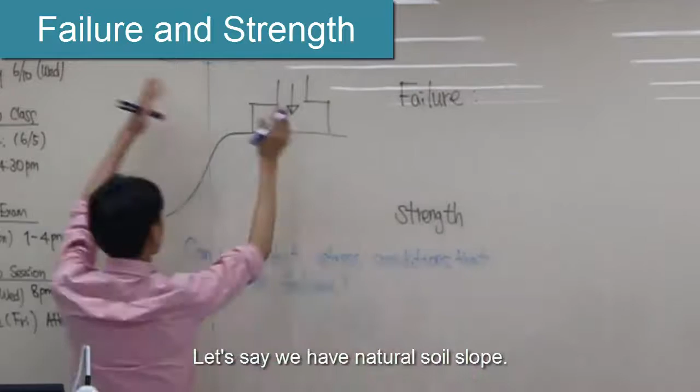What's the definition of a failure? Say that we have a natural soil slope, and we're building a structure on top of it. Depending on the weight of that structure, you increase the stress in the soil—maybe here, maybe here, maybe here too. Initially, the vertical stress was sigma naught, and because of this foundation and the upper structural weight...

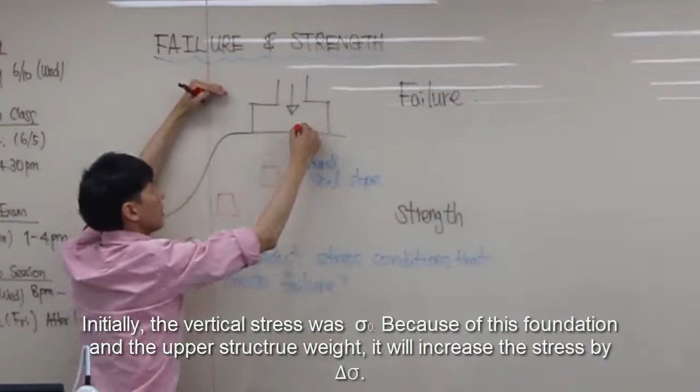it will increase the stress by delta sigma. Then, if the delta sigma exceeds the certain threshold value the material can sustain or resist, you develop failure. The soil will slide for this condition—it's easy to slide down because of the weight.

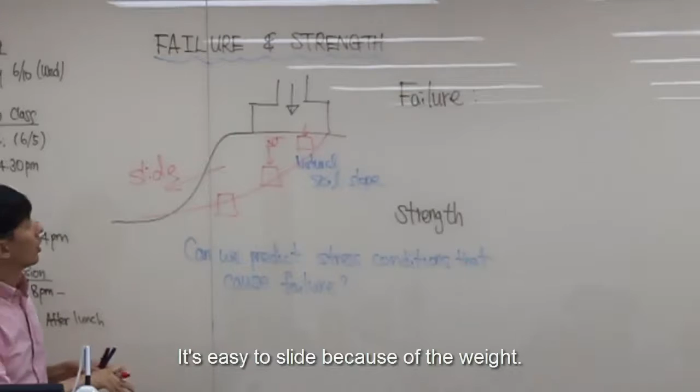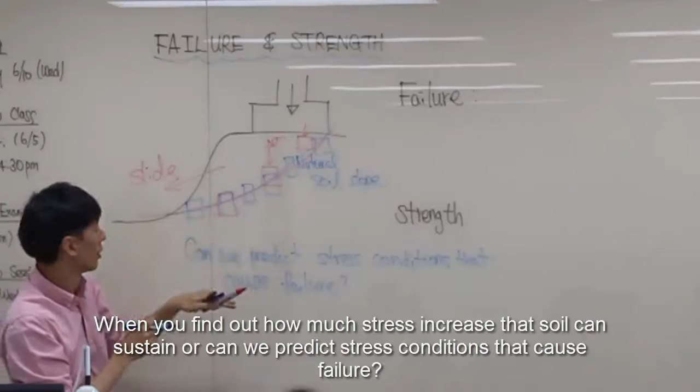When you look closely at the failure envelope or failure line, you have a failure surface, and each soil is failed because of excessive stress. So we need to find out how much stress increase the soil can sustain, or can we predict the stress condition that caused failure? Then we can compare that failure stress condition to the current stress condition and see how much more load can be sustained by this soil.

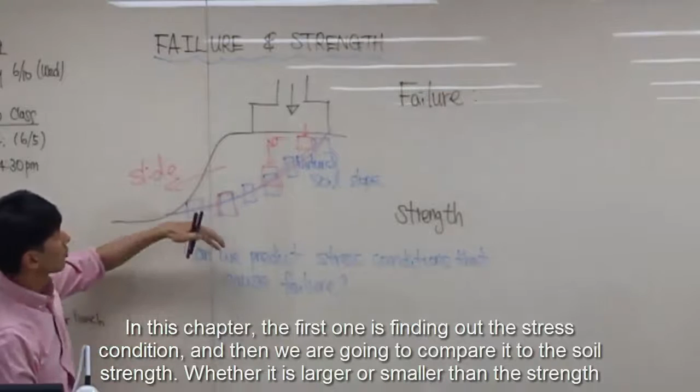So in this chapter, the first question is to find out the stress condition. Then we're going to compare that to the soil strength, whether it's larger or still less than the strength of the soil. That will be our main question of this chapter. So let's define failure first.

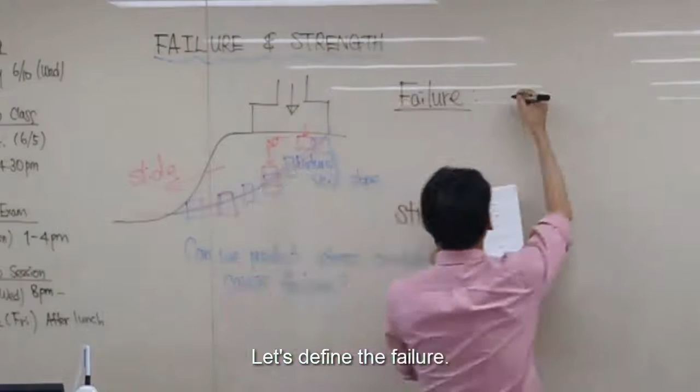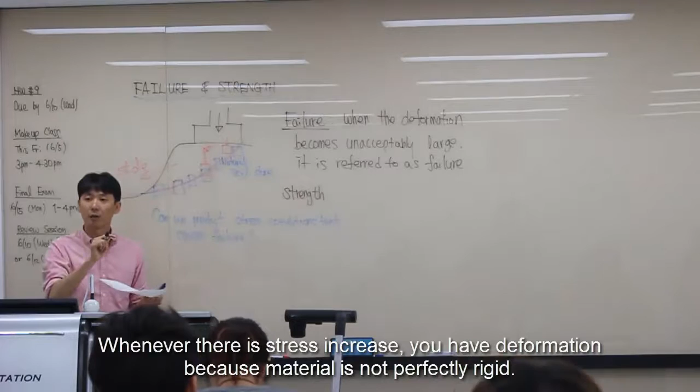Failure is when the deformation becomes unacceptably large—that's referred to as failure. Whenever there's a stress increase, you have deformation because material is not perfectly rigid. Whether that deformation is acceptable or not determines whether the material, the media, the ground, or the structure has failed.

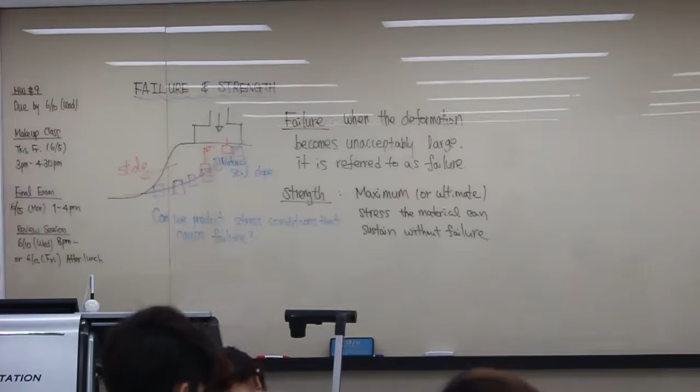Strength of material is defined as the maximum stress that the material can sustain without failure. Let's go back to this natural slope case.

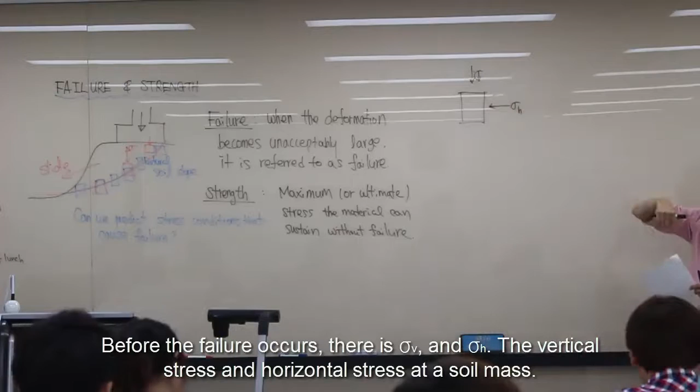When you closely look at the soil here, there's a failure envelope. Initially, before the failure occurred, there's a sigma V and sigma H—the vertical stress and horizontal stress at that soil mass. Suddenly, because of this delta sigma, it failed along this failure line. This is the failure plane.

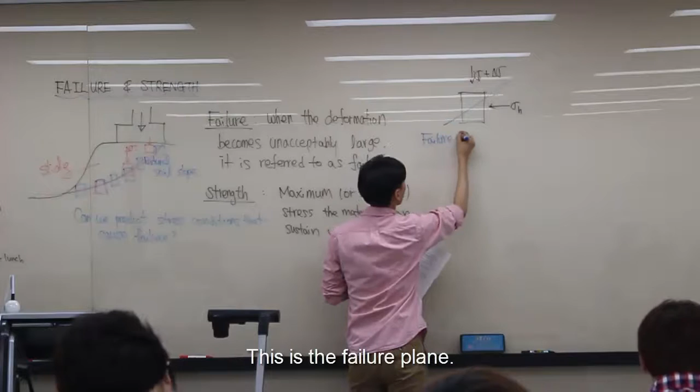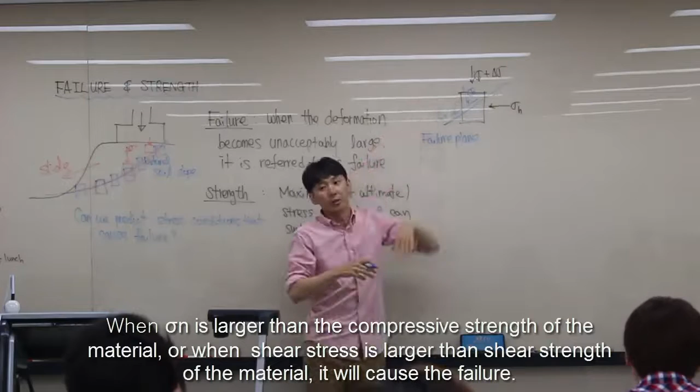Then, when we look at this failure plane, there should be a normal stress, sigma n, and a shear stress, tau n. So whether this sigma n is larger than the compressive strength of the material, or whether this shear stress is larger than the shear strength of the material—either of these cases will cause failure.

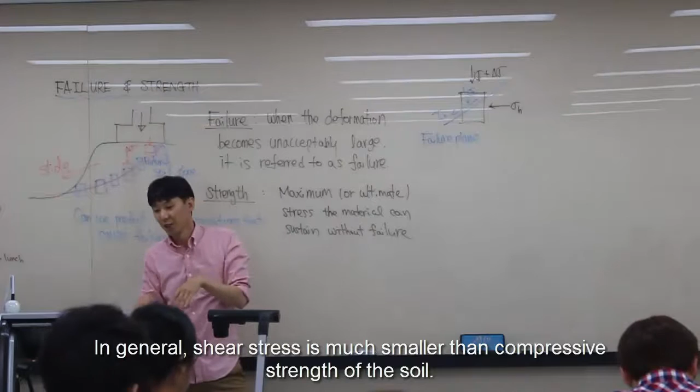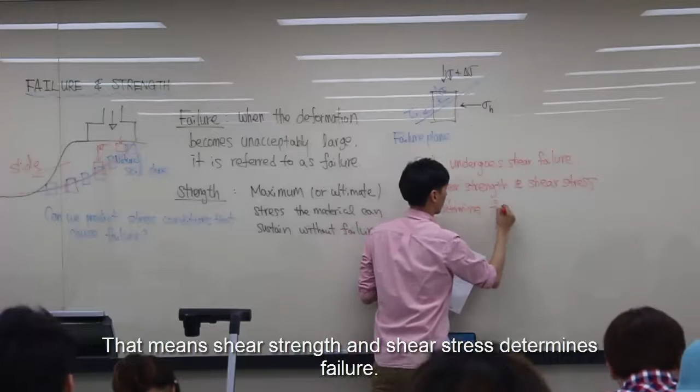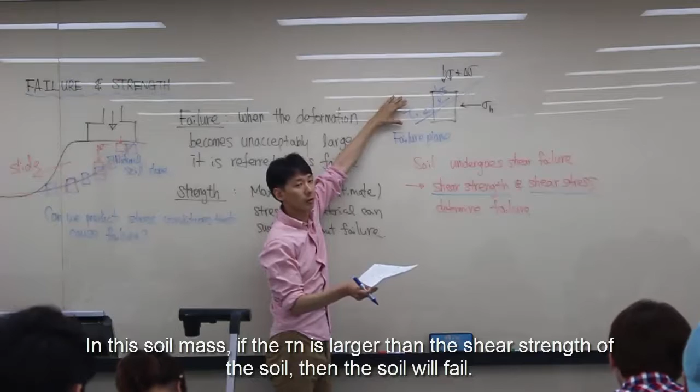In general, shear strength is much less than the compressive strength in soil. So that means the shear strength and the shear stress determine the failure condition. In this soil mass, if tau n gets larger than the shear strength of the soil, the soil will fail. If less than that, the soil can resist or sustain without failure.

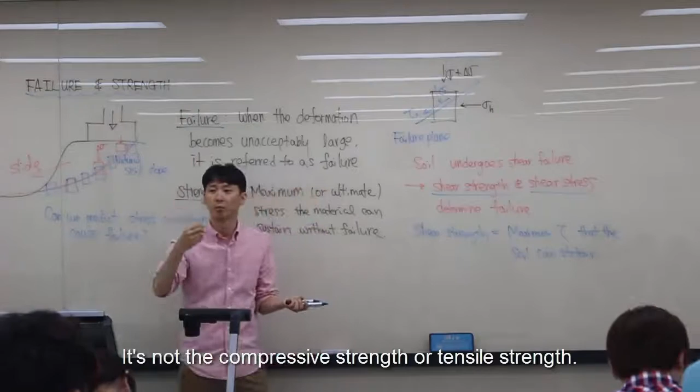So in soil mechanics or geotechnical engineering, in terms of strength criteria, shear strength is the most important—not the compressive strength or tensile strength. We only look at shear strength because shear is the weakest part; it's certainly easy to slide.

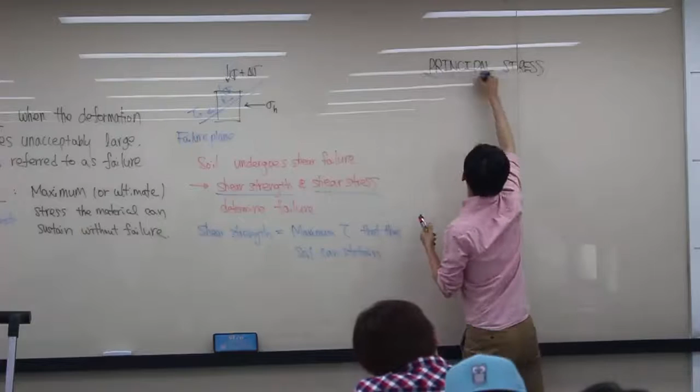Any questions? So, just for this class today, we're going to go back and talk about principal stress, principal strain, and normal stress and shear stress. Principal stress.

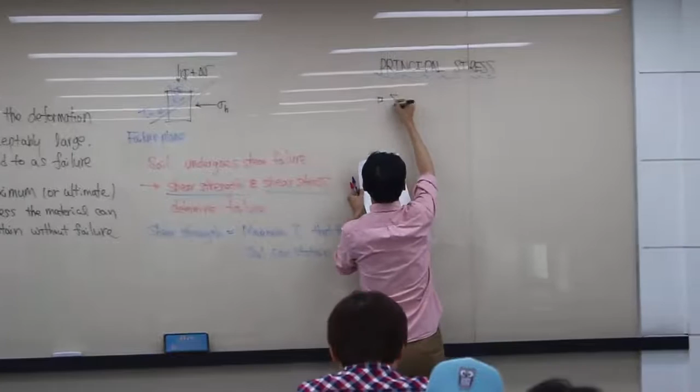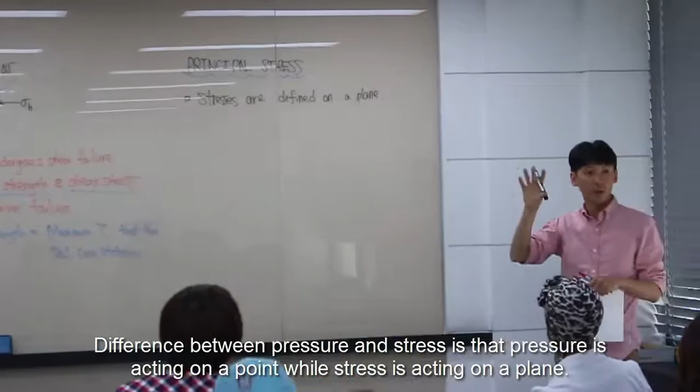We talked about this before, months ago. The difference between pressure and stress is: pressure acts on a point, and stress acts on a plane. That's the difference between stress and pressure.

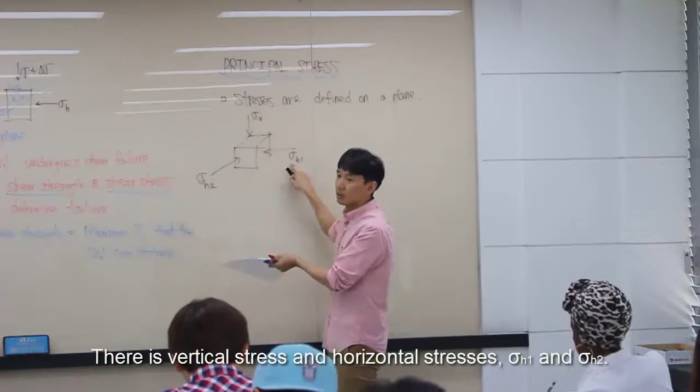In a three-dimensional world, you have three orthogonal planes: sigma V, sigma H1, and sigma H2. For example, if you go outside, dig up, and sample soil from a certain depth, you can estimate the vertical stress and the horizontal stress from two directions—sigma H1 and the other horizontal stress sigma H2.

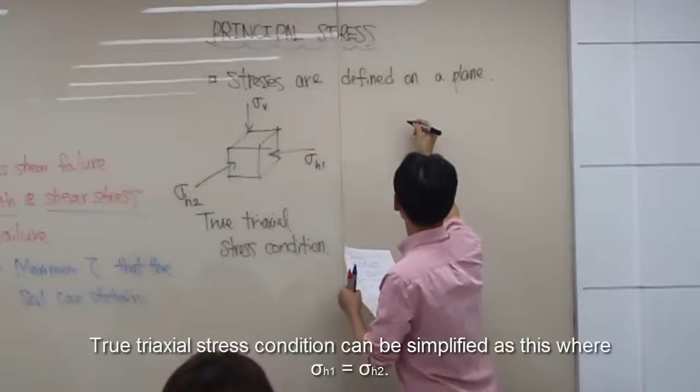Generally, this is a true triaxial stress condition. This true triaxial stress condition can be simplified as this kind of model, where sigma H1 is the same as sigma H2—there's a vertical stress and a stress acting in a radial direction.

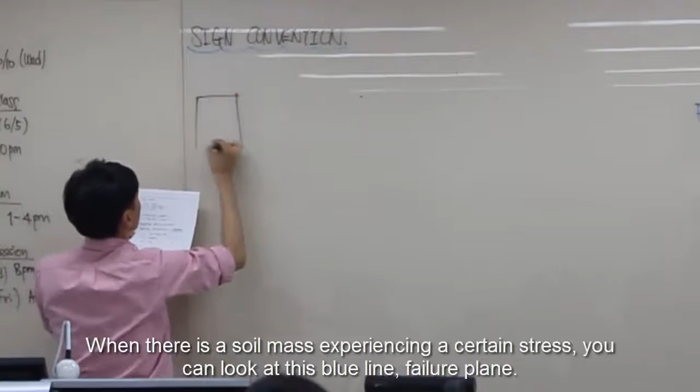So these follow our sign convention, and there's a soil mass experiencing a certain stress. If you look at this failure plane, the blue line, you can take out the bottom part of this little mass like this. The normal stress is sigma n, or sigma sub n—some people call it sigma theta—and this direction is defined accordingly.

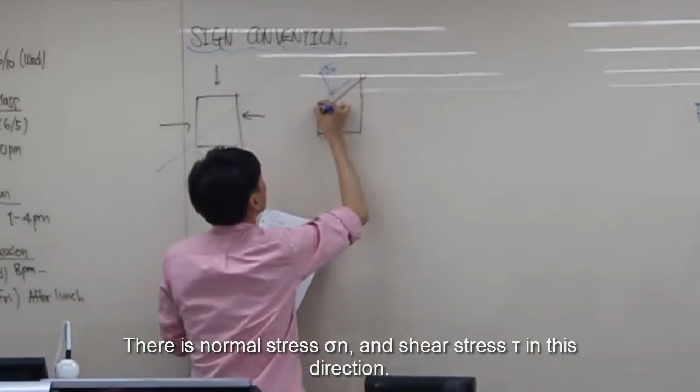So for the normal stress, compression is the plus, it's a positive value. And tau is the shear stress.

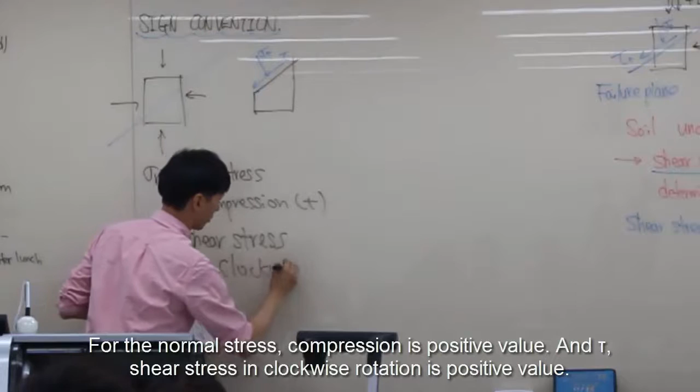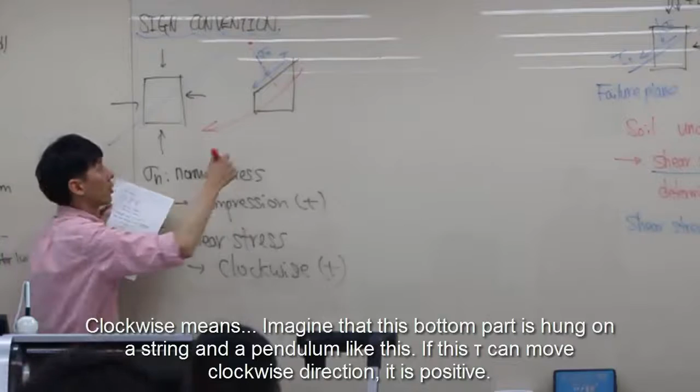Clockwise rotation is the positive value. So clockwise means, imagine that the bottom half of this mass is hung on a string as a pendulum like this, and if this tau can move this object in the clockwise direction, then it's positive. So if the tau is in this direction, this will move counterclockwise, so that's a negative value.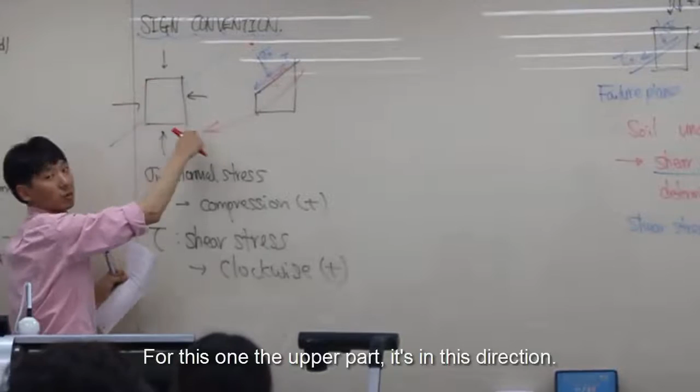So the point is here. Thinking of the string, the material is hung on a string, and that moves in this direction, then it's a positive. For this one, the upper part, this is the normal stress, and this way.

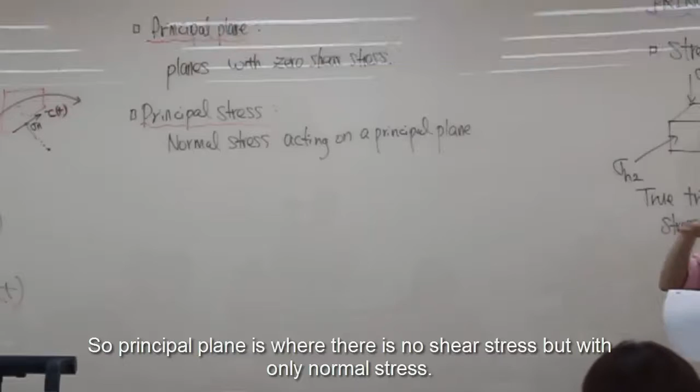So principal plane is the plane with zero shear stress. There's no shear stress, there's only normal stress. And principal stress is that normal stress acting on the principal plane.

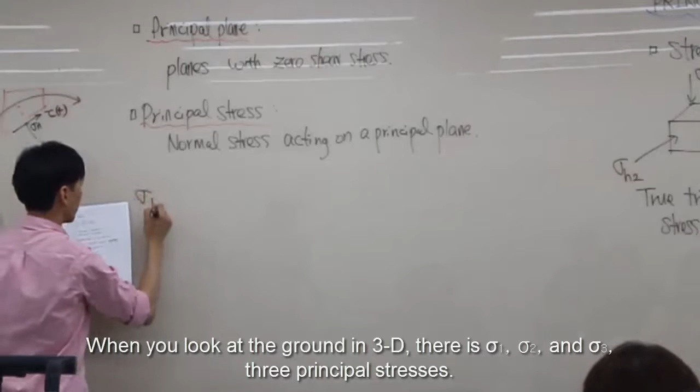This is the definition. So when you look at three-dimensional like ground, inside the ground, then there's sigma 1, sigma 2, and sigma 3. There will be three principal stresses. The largest one, sigma 1, is the major principal stress.

Principal stress, and this is minor. So in terms of magnitude, sigma 1 is the largest, and sigma 3 is the smallest stress.

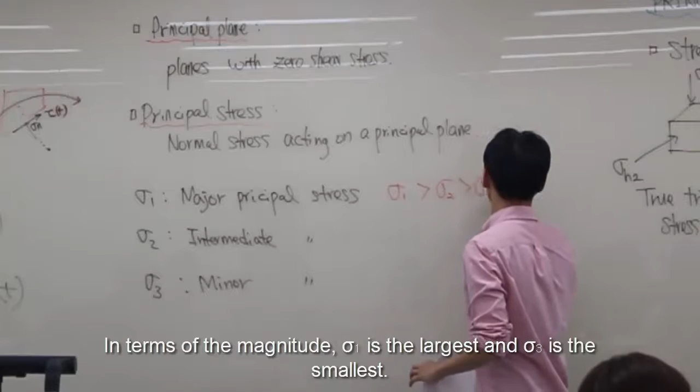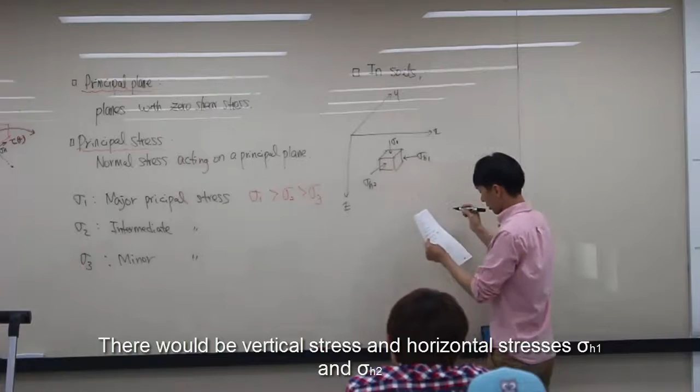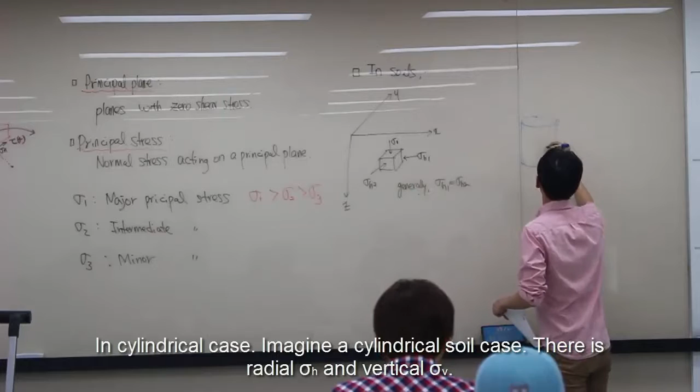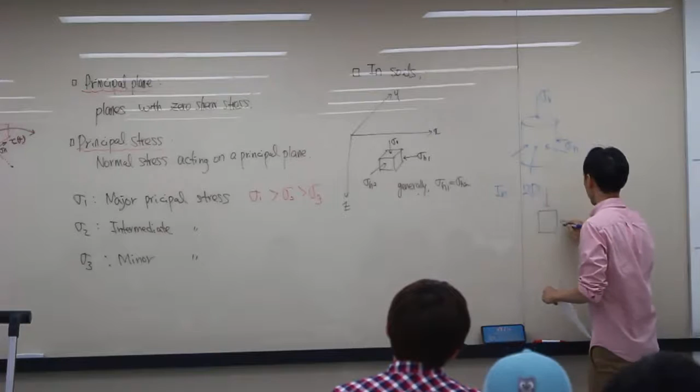So we can divide it into a cylindrical case. We can imagine a cylindrical soil mass with a radial sigma H and the vertical sigma V. And we can simplify it into two dimensions. There's a soil mass, 2D, and say we have a soil mass in 2D plane.

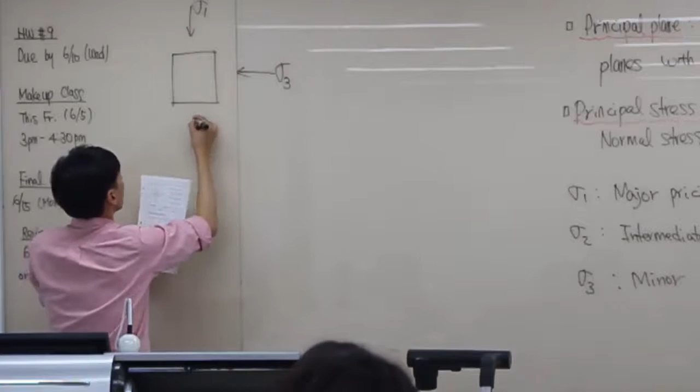Sigma 1 is acting vertically, and sigma 3, the minor principal stress, is acting horizontally on a soil mass. And then, if this is the failure plane, blue is the failure plane, we want to find out the normal stress here and the shear stress on this blue plane, tau theta.

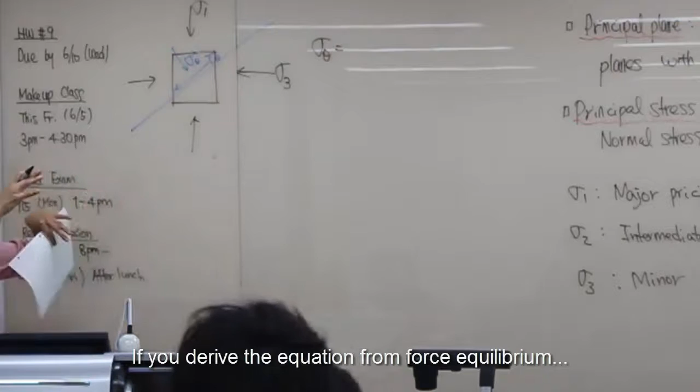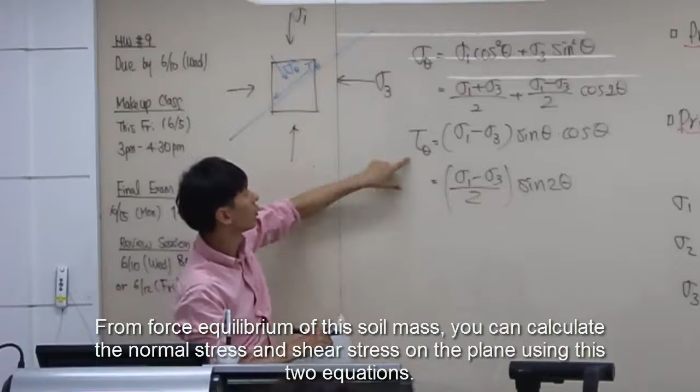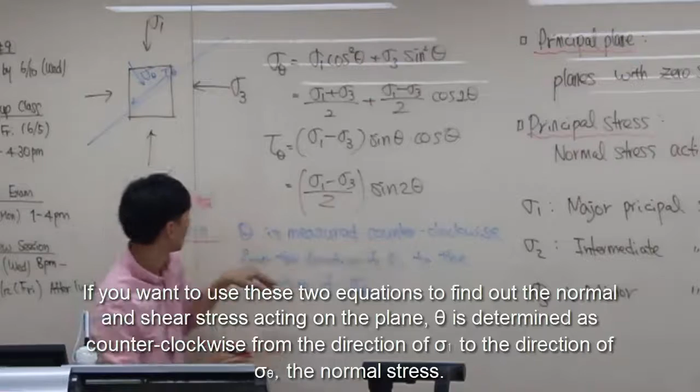And here theta, the important thing is to define theta, the angle of the stress. This is a very important rule. In this equation, if you want to use these two equations to find the shear stress and normal stress acting on a certain plane, then theta is determined as counterclockwise from the direction of sigma 1 to the direction of sigma theta, the normal stress.

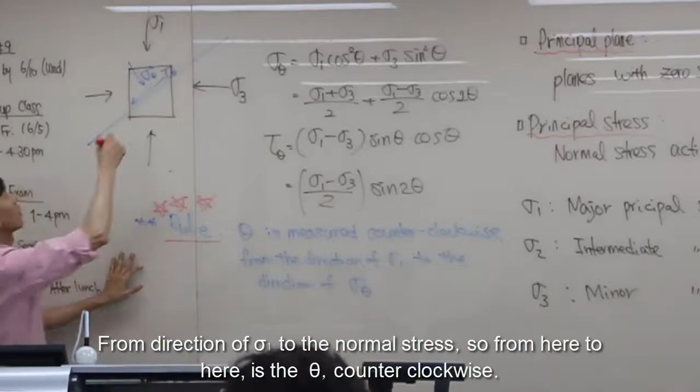So in this case, what's theta? From the direction of sigma 1 here, right? This is the direction, the vertical direction. Vertical direction to normal stress, sigma theta. Sigma theta is acting in this direction. So from here to here is theta, counterclockwise.

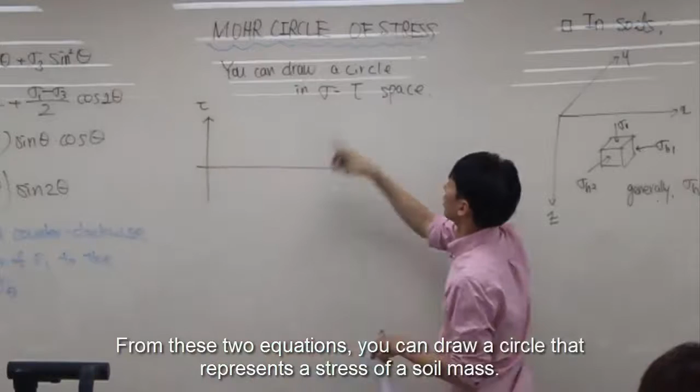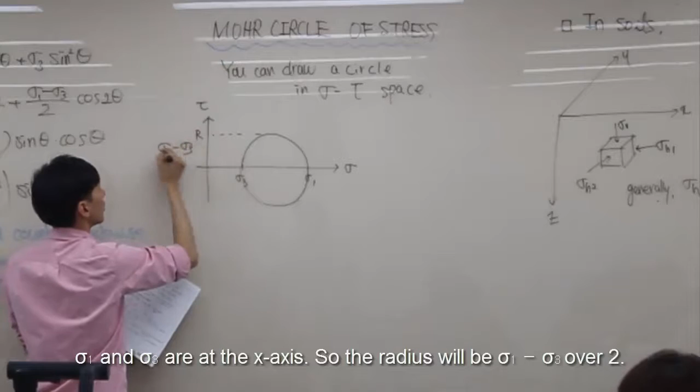So from these two equations, the tau theta and the sigma normal stress equation, we can draw a circle that represents the stress of the mass. Intersect sigma 1 and sigma 3 at the x-axis. And so the radius will be sigma 1 minus sigma 3 over 2, from here to here.

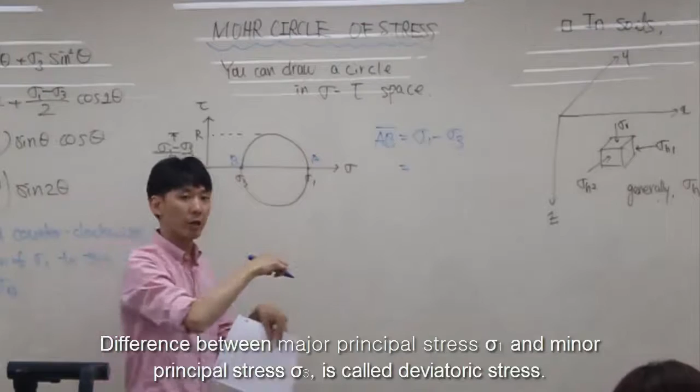And here, let's say this is A and B, point A and point B. And sigma 1 minus sigma 3, the difference between the major principal stress and the minor principal stress, is called the deviatoric stress. What about the center? This is the center, and the location of the center will be sigma 1 plus sigma 3 over 2.

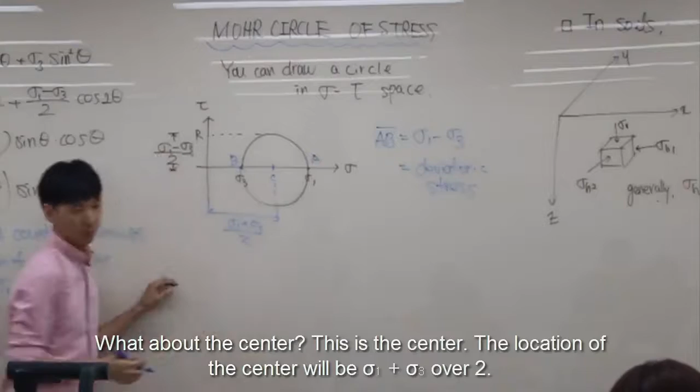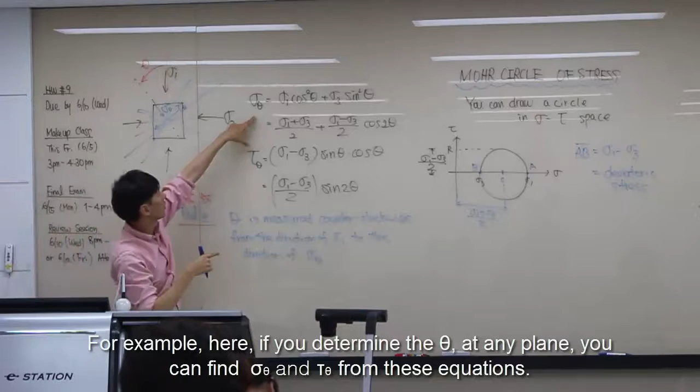This equation indicates that if you know the sigma 1 and sigma 3 of a certain soil mass, you can find the normal stress and shear stress of any plane. For example, if you can determine theta, you can plug into these two equations for the vertical, horizontal, or any angle, and find sigma theta and tau theta. Actually, this Mohr circle represents the normal stress and shear stress of any given plane of interest, and it's called the Pole method.

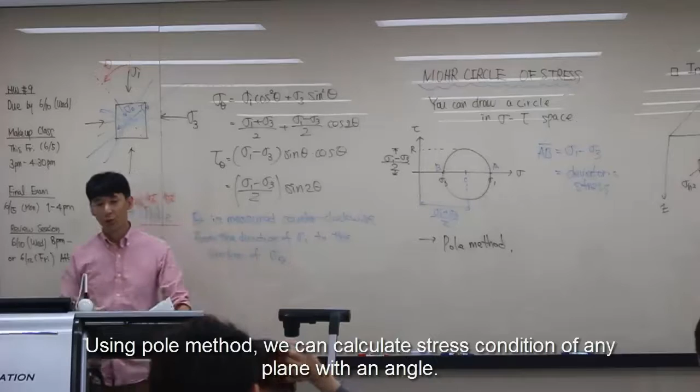Using the Pole method, we can calculate the stress condition on any plane with any angle. The stress condition of the soil mass is described step by step. First is to find the pole of the plane, the origin of planes, so O sub P. To find the pole, in this Mohr circle you have to find it first to determine the stress condition on an interesting plane.

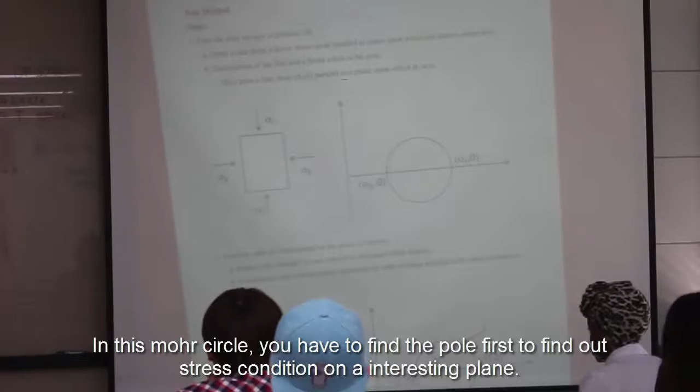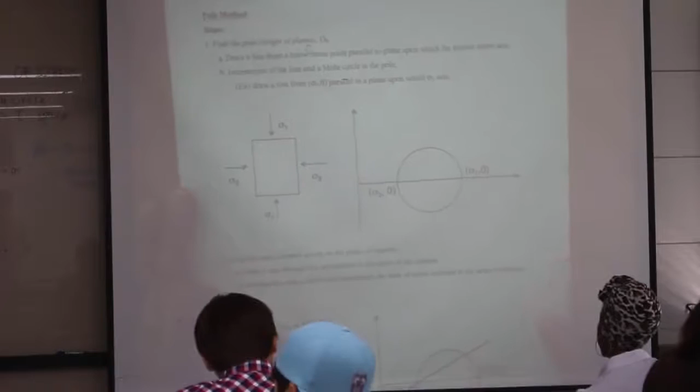So the first step is to draw a line from a known stress point parallel to the plane upon which the known stress acts. Let's say we know sigma 1, the major principal stress, and sigma 3, the minor principal stress, acting on a soil mass. We can draw the Mohr circle like this, where the x-axis is the normal stress sigma and the y-axis is tau, the shear stress - so the sigma-tau space.

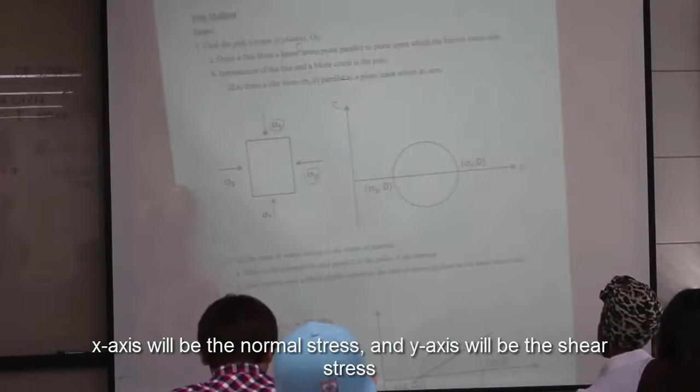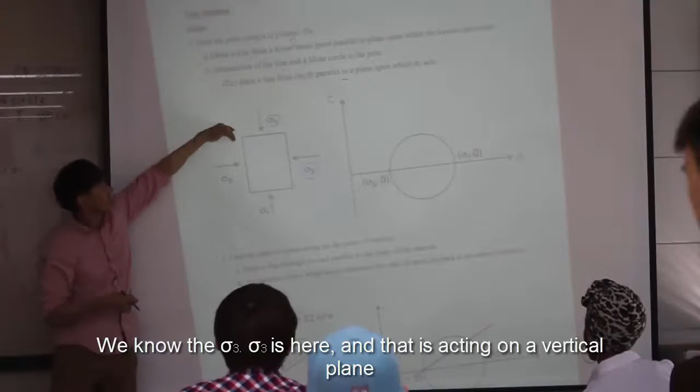Here, draw a line from a known stress. Because we know sigma 3 is here, and that's acting on a vertical plane. The sigma 3 is acting on a vertical plane, so we can draw a line parallel to that vertical plane, crossing sigma 3 on the axis. Then the intersection of the line and the Mohr circle is the pole. In this case, this intersection will be the origin of planes.

Or we can start from sigma 1, because sigma 1 is also a known stress on a known plane. Sigma 1 is here, and sigma 1 acts on a vertical or horizontal plane, so we can draw a line from here horizontally. Then the intersection will be here. So whether you start from sigma 1 or sigma 3, you get the same pole, OP. So this is the plane of interest.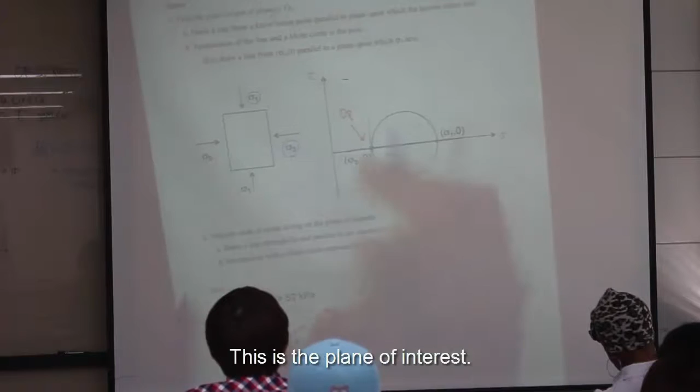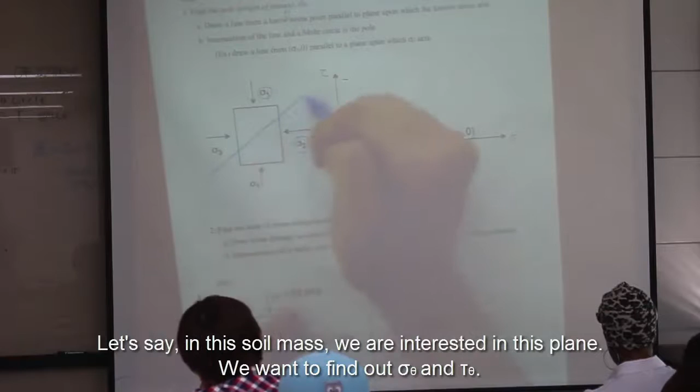Then the second step is to find the state of stress acting on the plane of interest. Draw a line through the OP parallel to the plane of interest. Let's say in this case we are interested in this particular plane, and we want to find sigma theta and tau theta. Then you can draw a line parallel to this plane of interest from the OP, like this.

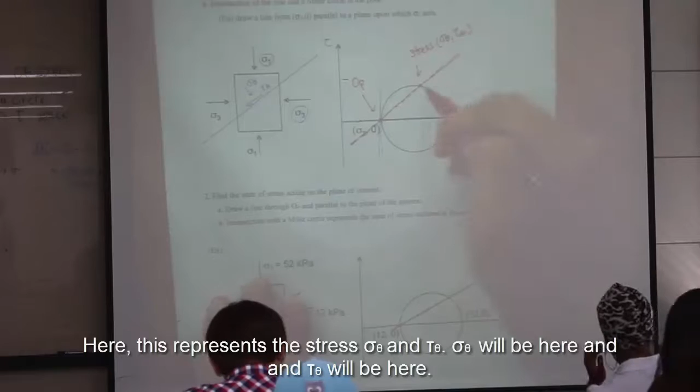It's not very accurate, but assume these two lines are parallel. Then the intersection with the Mohr circle represents the state of stress inclined at the same orientation. So here, this represents the stress sigma theta and tau theta. The coordinate of the intersection point tells you the normal stress and shear stress of that plane of interest.

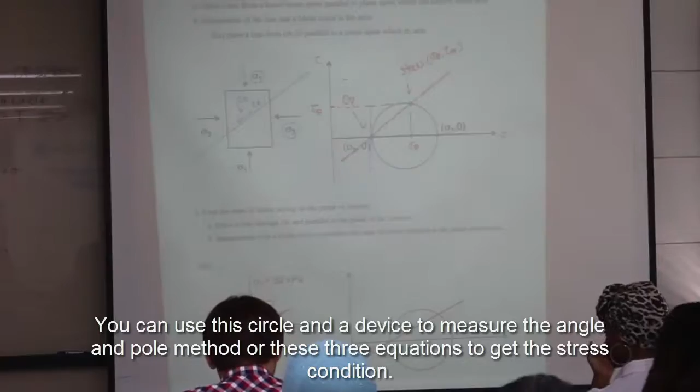And this is the Pole method, the graphical method. So you can use this circle with a compass or a device to measure the angle. You can use the Pole method, or you can use these three equations to get the stress condition. What about this stress?

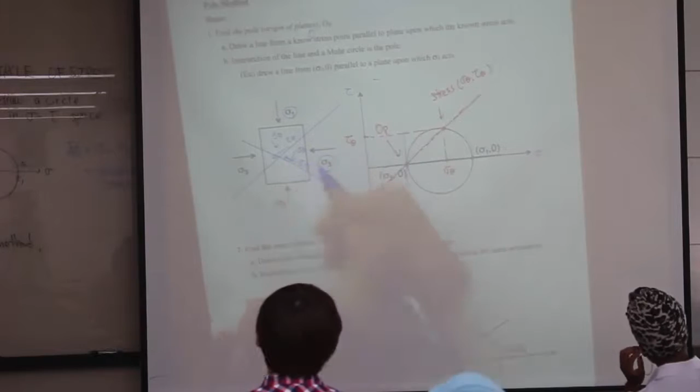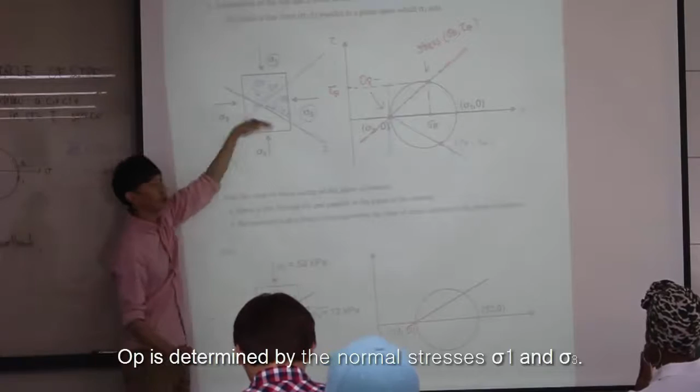Then you can draw a line parallel to that second plane. Then this coordinate, the x and y coordinates, tells you the shear stress and also... the OP is determined unconditionally by this normal stress, sigma 1 and sigma 3. So the example is below. There are two ways you can choose: you can use the Pole method, or you can just use these three equations.

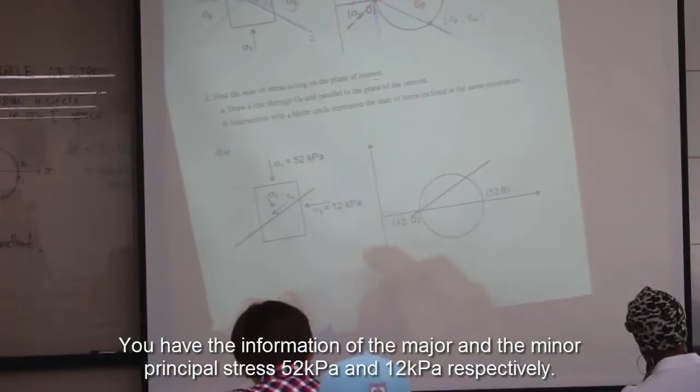Okay, example - the example at the bottom. You have information about the major and minor principal stress, 52 kilopascal and 12 kilopascal respectively, and the question is to find the normal stress and shear stress on this red line plane. This is about a 35 degree conversion. Let me draw here - this is the circle, sigma 3 is at 12, sigma 1 is 52.

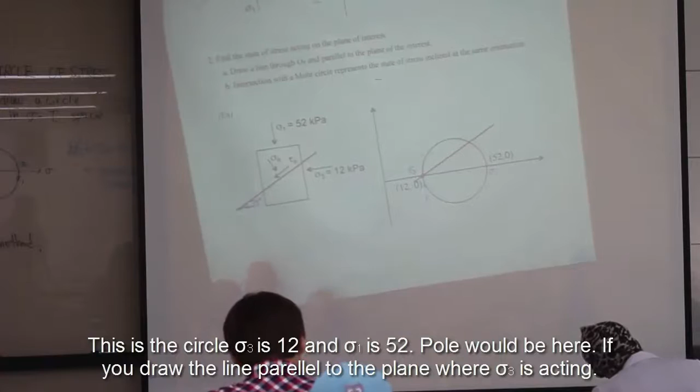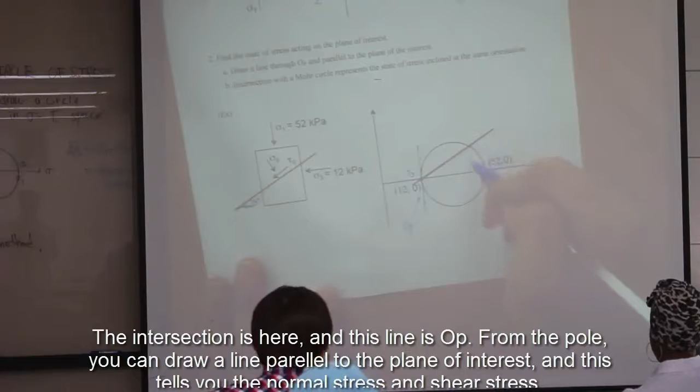And you can draw a line parallel - we need to find the pole, right? The pole will be here, because if you draw the line parallel to the plane, actually sigma 3 is acting on the vertical plane. So you can just draw the vertical line, and then it's actually here, so that this point is the OP. And from the pole, you can draw a line parallel to the plane of interest - this is the red line, and this tells you the normal stress and shear stress.

So, if you measure it, or use those two equations, you get the normal stress of 39 kilopascal and the shear stress of 18.46 kilopascal.